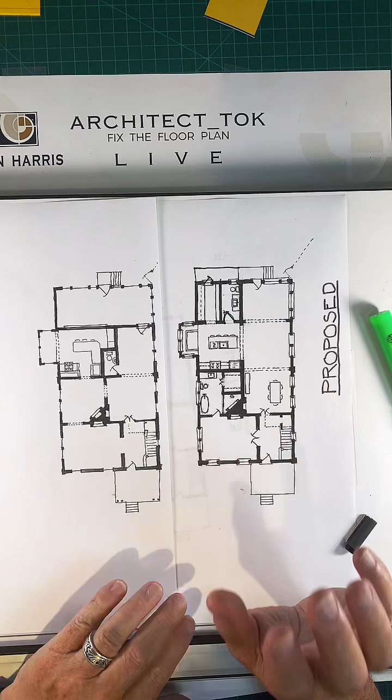Which one is existing? This is existing, this is proposed. I got rid of the word 'existing' underneath here because they didn't have room within the slide to show both existing and proposed. But this is the before and after, if you will.

Where does the bed go in the bedroom? There's any number of options. It can go on this wall. I don't recommend it go on that wall. I'd recommend it go on this wall and have a seating area over here next to this window.

Is there a tool that can help count material from blueprints? Yes, most CAD programs will allow you to measure and do quantity takeoffs. If you do enough repetitive work in a CAD program, especially if you use BIM, it can count up the square footage or linear footage of moldings and all your materials. So yes.

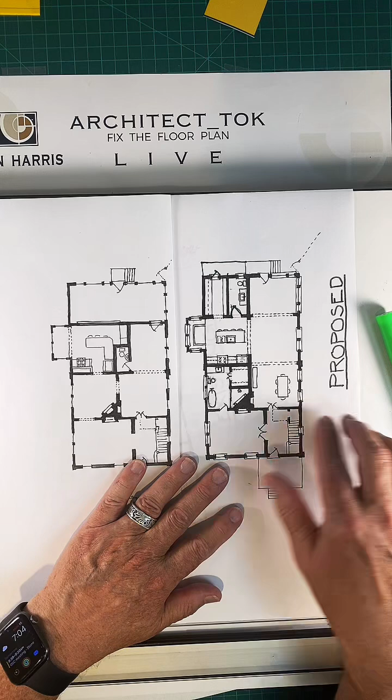Or make your library buy it, yeah, that'll work too. The last chapter is a four-letter word, COST, and that chapter is all about, without mentioning the names of clients, ways clients throughout the decades have tried to save money on their construction. Everybody wants to get the most for the least, and I'm in that same boat. Sometimes it works, and sometimes it doesn't. So that chapter, I talk about things to be careful for.

Hammer, thank you. You looked at the book, and now all your clients retain you. That's great. Hammer, I love Maryland, love the architecture there. I have two son-in-laws.

I have three daughters, and two of them married boys from Baltimore, Maryland. And I love your crab cakes. Great food.

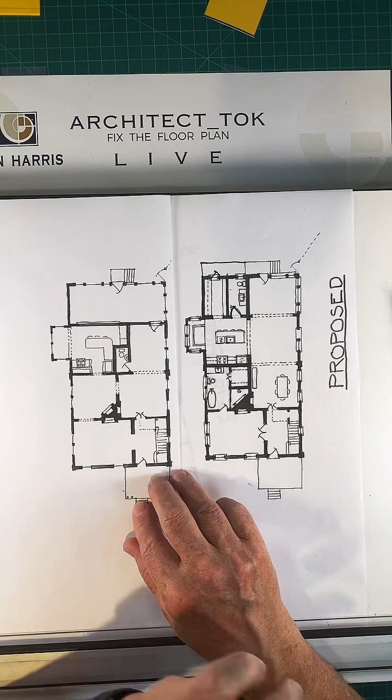Kevin, if you've got a blueprint for a house you want to build, get on my website. But I've got to warn you, I'm only licensed in 5 states. Since I call myself an architect, I can only give advice in states that face the Gulf of Mexico: Texas, Louisiana, Mississippi, Alabama, and Florida. If you're in one of those states, I'd be happy to do a design consult for you. I'll get in trouble if I call myself an architect and I'm not licensed in your state.

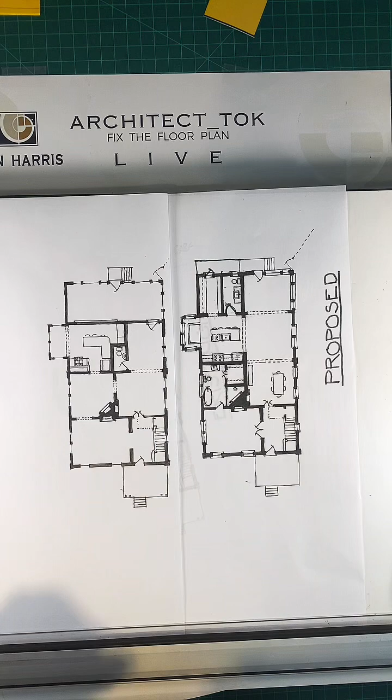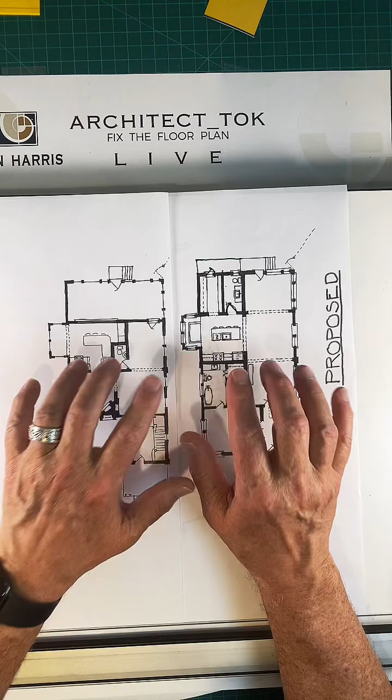Well, you work with it. So what I do is I talk with both the husband and the wife, or if they're partners, both partners, and I make sure they're aware and on the same page as far as how much they want to spend. I tell them I will guarantee whatever we draw will be beautiful, and if they go through the process we do, they will only pay what it costs to build their house. However, I can't guarantee the price. That's from the contractor, and that's why I bring in the contractor at schematic design.

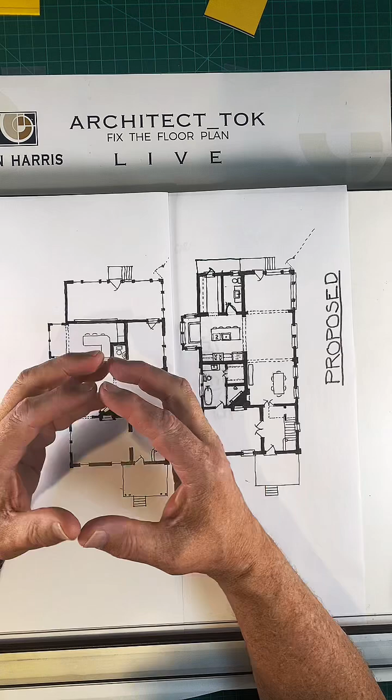So husband and wife, or partner and partner, have to be involved and in the communications throughout the whole schematic, pricing, and final design process. It can't be just one or the other. You can't have the husband come in and say, 'all right, here's my budget,' and then the wife comes in and says, 'here's what I want.' They have to come together. It's a negotiation, and it's a process that any other architects thinking about getting into residential design need to understand.

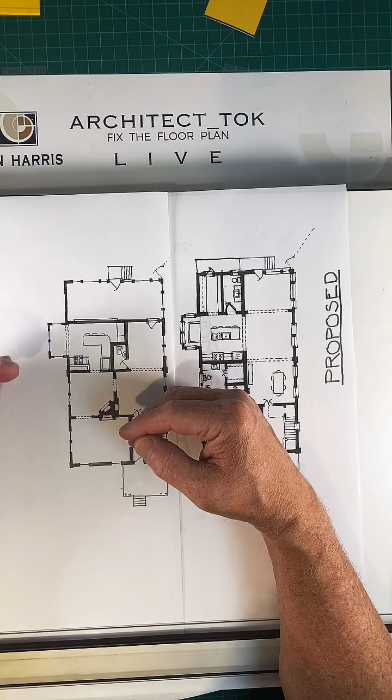There's no bad guys just because something costs more than somebody wants to spend. Things cost what they cost. Good work for a fair price costs. So if you have an open book process, which we recommend, going through with a selected contractor from schematics through construction—same contractor—they give you the cost feedback. The person best qualified to give you a cost for a scope of work is the person who's going to do the work, not someone who's going to look at a booklet and say bricks are so many dollars a square foot. But what about bricks in a certain pattern? The books don't cover that. Anything custom breaks the mold from all these books.

So cautionary tale: have everybody, all the players involved, as much as you can throughout the process.

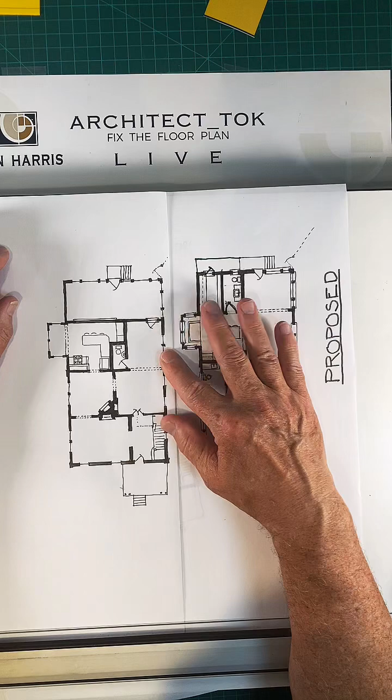So do I know any architects in Las Vegas? I do, but I'd have to go get my Rolodex. What I can tell you is call your local AIA chapter and ask them for CRAN architects that are CRAN members—custom residential architects network. We've had a CRAN conference in Las Vegas, and there are dozens of really talented residential architects there you can get in touch with. So please check the AIA chapter and ask them for CRAN members in the Las Vegas area.

And let me see, Rolodex is a boomer thing. I'm a baby boomer.

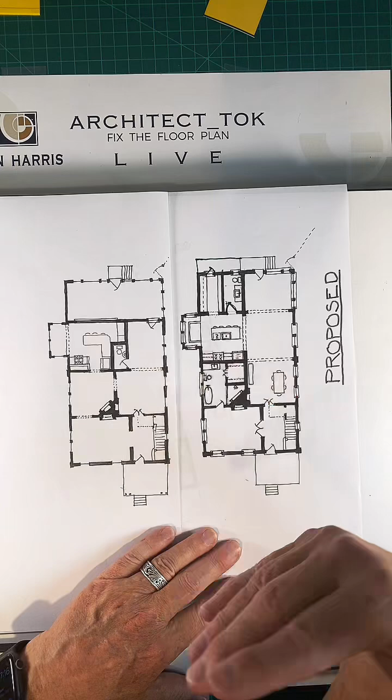I was born in 1954, and a Rolodex is a list of cards with names, phone numbers, and addresses of everybody you know. I use Outlook now instead of a Rolodex, but I still use that term. I call my refrigerator an icebox too - I inherited that from my parents.

Speed, quality, price - you can only have two. That's correct, you get to pick two.

In my book, I call it the iron triangle. You've got cost, you've got time - how long it takes - and then you've got quality. The sad news is you only get to pick two. Would you like cost and time? Then you sacrifice quality. Or if you want high quality and low cost, great, you can do that, but it's going to take a lot longer. In my book, on page 161, I talk about the variables of time, budget, and quality.